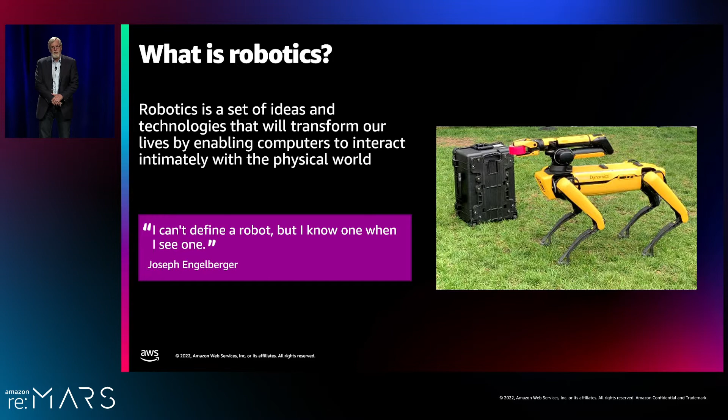So when you look at our companies that are at MassRobotics, they vary anything from agricultural drones to exoskeletons to 3D printers, which we actually consider a robot in the way we define it. And I want to share a little bit of insights on what we're seeing from the companies we work with and what's happening in the industry.

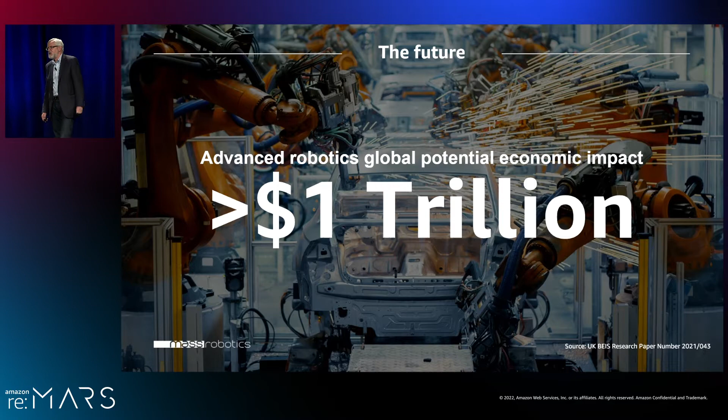So why should you be interested? The market now is projected to be about $200 billion by 2025. To give you a sense, today, depending on whose numbers you look at, that's between 30 and 50 billion. So basically a 4x in the next 3 years. That's a tremendous amount of growth. Also, the impact that robots are expected to have on the global economy in the same time frame will be over $1 trillion. So that's a combination of increase in productivity, decrease in labor costs, things like that. But when you get to those kind of numbers, that's a serious industry that people are getting very involved in.

So when we look overall at robotics, we see a number of different areas that companies are focused on. And I'm going to go into a little bit of detail on each of these to give you a sense. I'm going to include some data just so you get a kind of sense of growth, estimated growth and size. But together as a whole, robotics is an incredibly rapidly growing industry, and one that hopefully you'll be involved in. You'll have companies that will want to start and scale in this industry.

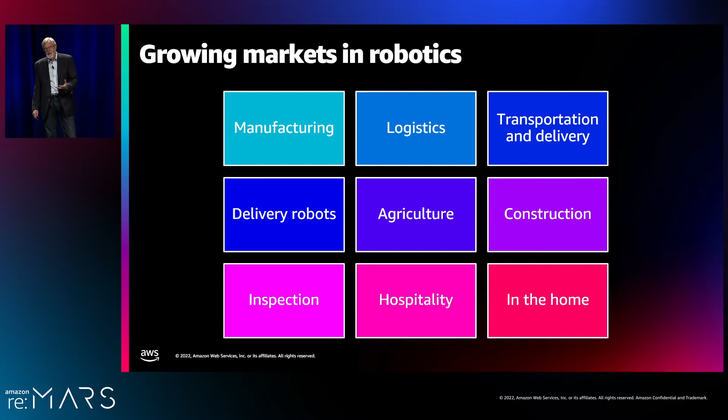So in terms of manufacturing, it's certainly the area that is traditionally known for robotics. Robotics have been on the assembly line of cars for many decades now. And that's traditionally what people think about when they think of factory automation. But we're seeing changes in that. We're seeing a lot more flexibility in automation, so collaborative robots. And then we're also seeing just different ways that robots can be used beyond what you see in assembly, but supporting the entire manufacturing infrastructure - delivery of goods, prepping parts, painting, all the way through, everything you see in a potential site. And again, I'm not going to go through the statistics that are on the slides, but they're just to give you a sense for what people are expecting these different markets to be.

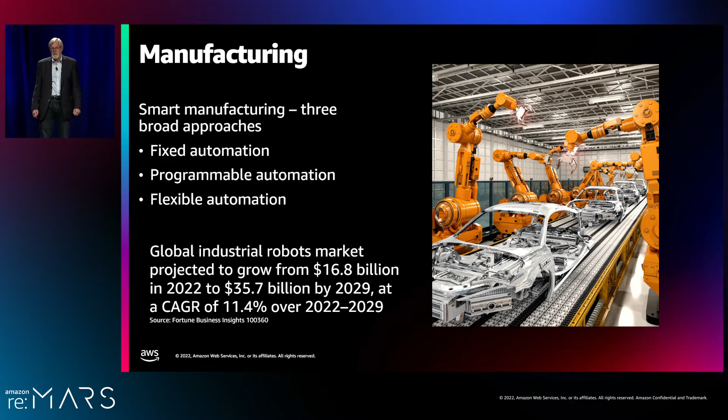So in terms of what we see in our innovation center around robotics, they fall into a couple of different areas. Collaborative robotics, probably the largest - we have a lot of companies working on the deployment of collaborative robots, either building a collaborative robot themselves. And if you don't know what a cobot is, it's basically an industrial arm that is human safe, that depending on its design, but it basically allows you to work side by side that arm. So we have a lot of companies who are working both on the arms themselves, but on the accessories and the ways to install these robots so that they become much more capable and much more easy to deploy and install, which opens up the market. It allows small and mid-sized manufacturers greater access to these tools, and we're seeing that show up in the numbers that are growing.

We see a lot around manipulation, the end effector. So soft robotics is one area that has certainly grown. We have a company called Ubiros that is doing soft gripping. Soft gripping allows you to pick up objects that traditional grippers cannot. This is valuable in manufacturing, but also in other industries like agriculture - picking of soft fruits and things like that so you don't damage them. That's a great area.

Another area is the ability to high-speed, rapidly plan the movements of the arms and then coordinate them with multiple arms, so you have multiple arms moving very rapidly without collisions and avoiding humans. Part of the way they do that is through workspace mapping, the ability to understand what a human is doing on the manufacturing floor, what the robots are doing, and then make sure there is no possibility that the two will ever come in contact with each other. There's a company called Veo and a few others doing this, using different types of sensors, building their own sensors to really map out that manufacturing floor.

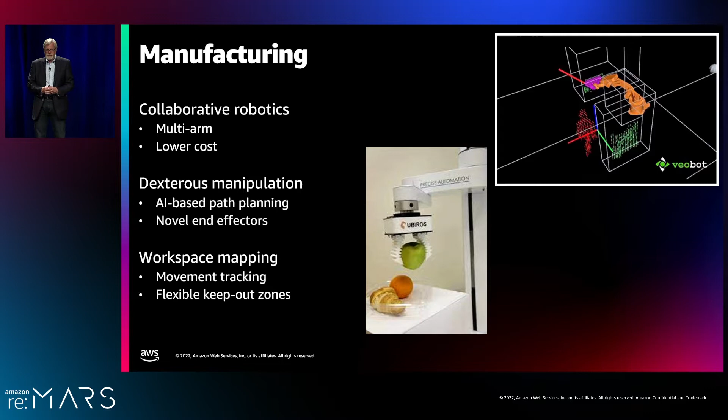The other area we're seeing, specifically on cobots, is that they right now make up a very small portion of the overall market - 3 to 5% of industrial arms are cobots. That is expected to increase dramatically, for a number of reasons I already mentioned. We're seeing Universal Robots, which is probably the most popular collaborative robot - in the picture you see, that's the gray and blue part of their robot. They've sold over 50,000, 55,000 I think now, and that's really only sold in the last couple of years. So we're seeing a huge amount of growth in this.

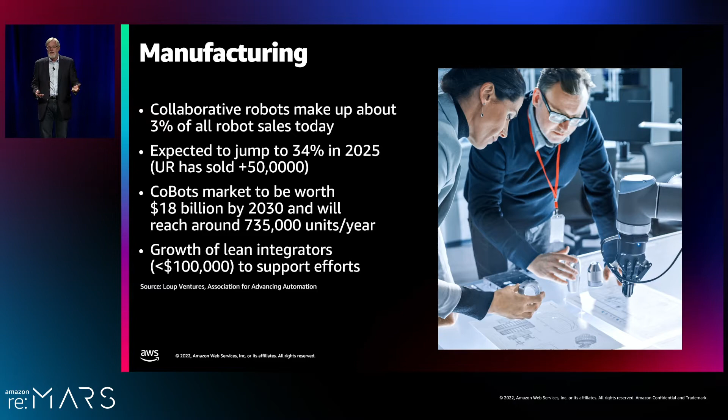As I mentioned, the interesting area is the cost to integrate. Traditionally installing robotic arms has been about a third to two-thirds - a third being equipment costs, two-thirds being installation and support costs. So when you're looking at a $50,000 arm, all of a sudden your entire package is $150,000. We're seeing a lot of what we call lean integrators, people installing these for significantly less and supporting them for significantly less. There's also software that allows virtually anybody on the factory floor to control these arms, install them, reprogram them, which is a big issue for small and mid-sized manufacturers. They don't have a long enough run to install these systems permanently - they might be doing one job, then transition to another. If they need to bring an integrator in to help move that robot to the next job, they can't afford it. So new technology is being developed in that.

Certainly not surprising in logistics - we're at an Amazon event. I think you've all heard other speakers talk about what's happening. If you attended Tye Brady's talk, he announced 2 new platforms that Amazon is releasing within their systems to improve logistics. We see a number of startups in this area, and they're getting significant funding to really address the challenges that I think people are well aware of.

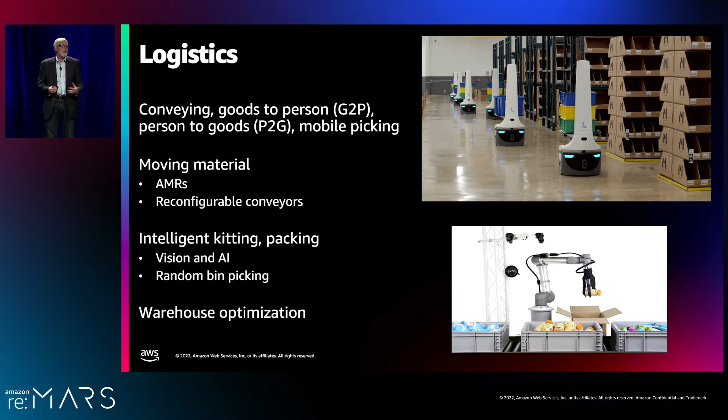AMRs, autonomous mobile robots, are probably one of the fastest growing areas, and then also the ability to manipulate, to pick. Picking still is a very challenging problem, mostly done by hand. In all of these automated system sites, you'll still have the human do the picking, but the robot takes away the movement of the goods. That increases efficiency, but picking is still a challenge, and that's where a lot of companies are focused, to see if they can come up with better, more efficient, more intelligent ways to pick.

The market in terms of logistics - we talked some about manufacturing, but the amount of investment in logistics robotics right now is really pretty amazing, and also the amount of activity. Here's a couple of points to give you a sense: Locus Robotics, which makes a warehouse automation system, just announced they've sold 2,000 of those to DHL. As a small company, Locus is still pretty young, so that's a huge order for them.

Then we look at some of the other ones - Berkshire Grey did a SPAC, as well as Symbotic. Symbotic is a total automated storage and retrieval system, and they have Walmart as their major customer. So you look at these kinds of deals and the VC money that has been invested, and you can understand why people believe this is certainly one of the largest industries within robotics.

Transportation and delivery, I'm not going to talk a lot about that. You certainly have heard about autonomous vehicles. We really are interested in the other non-traditional ways that people are addressing transportation.

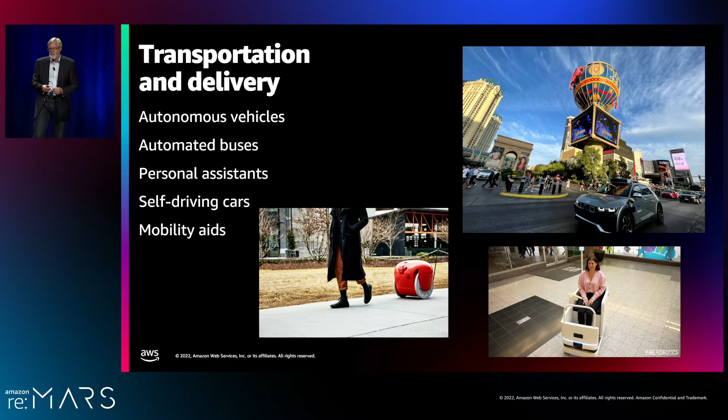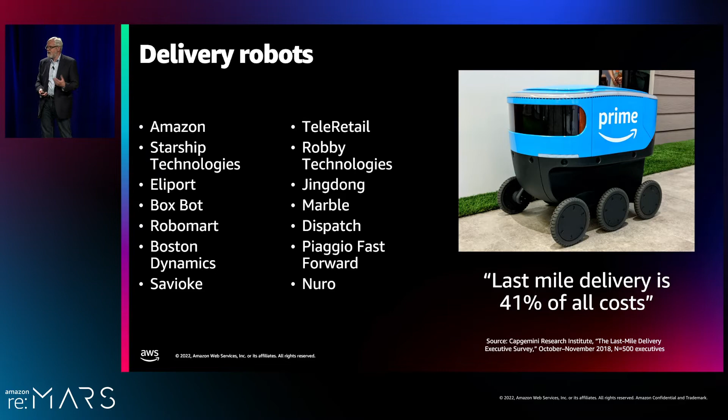As a section of transportation robots, we certainly see delivery robots. There are many companies trying to address this problem. The biggest reason is it's a significant portion of the cost of an entire delivery of your item that you order from Amazon or whomever. Almost half of that cost goes into what we consider the last mile, from the truck to the door or to the apartment or office. One way to address that is with delivery robots. A lot of companies doing that—Amazon's got their Scout, and there's a number of other platforms. That's, we think, a very interesting area for startups. No one yet dominates that area, so there's the ability for startups to get involved.

Agriculture, interestingly enough, we're based in Massachusetts. Not a lot of agriculture there—we have some apples, we grow some cranberries, but not huge agricultural fields. Yet a lot of the development is done, primarily because the technology is coming out of some of the universities. We see that in areas like field inspection for use of fertilizers, water, pesticides, and also ways to monitor the growth and health of the fields.

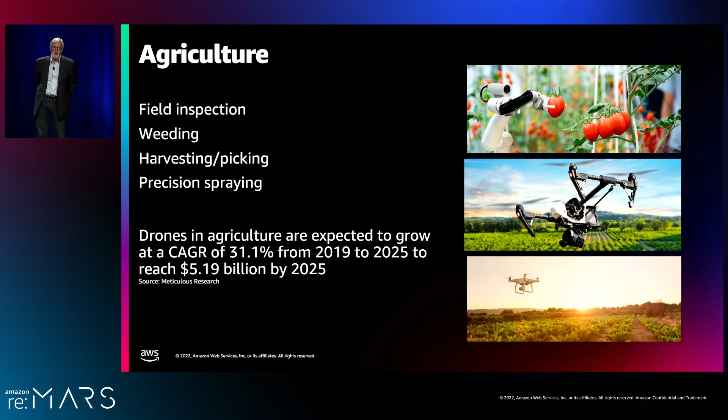Construction is another industry that I'd say is a laggard in terms of robotics. In Boston and most cities you're seeing cranes like crazy and construction going nonstop, but it's a hazardous environment. They are consistently behind schedule, over cost, and do not use automation to the extent that other industries do. That's starting to change—we're seeing some major construction companies now invest in accelerators or innovation spaces specifically targeted at construction, looking at technology across the range from site prep all the way to finished construction. This is one of the areas we believe will continue to grow, though it's still emerging.

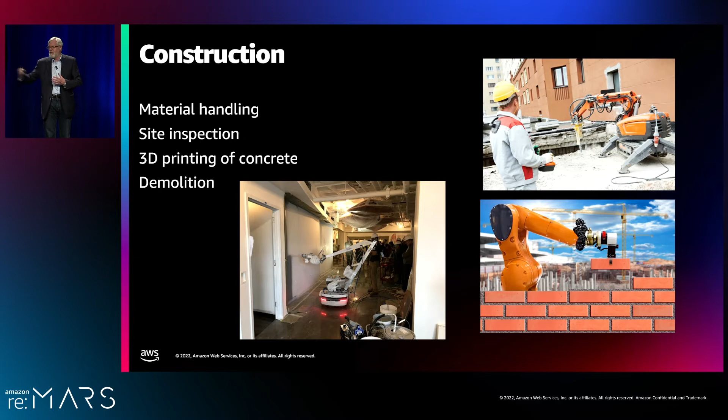Hazardous area inspection is one of the things Allison from Waymo talked about yesterday. She gave 4 areas that you should make sure your robot addresses. If you address all 4, that's really great. One of them is certainly hazardous operations, because there's real value to being able to take the human out and have a robot do its job.

The picture on the right is a small ducted fan drone called Dronut, and it's very safe—you can see a gentleman grabbing it out of the air. It's great for inspecting very narrow spaces, ducts, and other things where you want to get eyes on what's happening. On the lower left is a company doing oil tank inspection, another area you don't want to go into. If you can send a robot in to inspect the seams and welds, you can really save lives by taking people out of hazardous areas. It's a small but growing section.

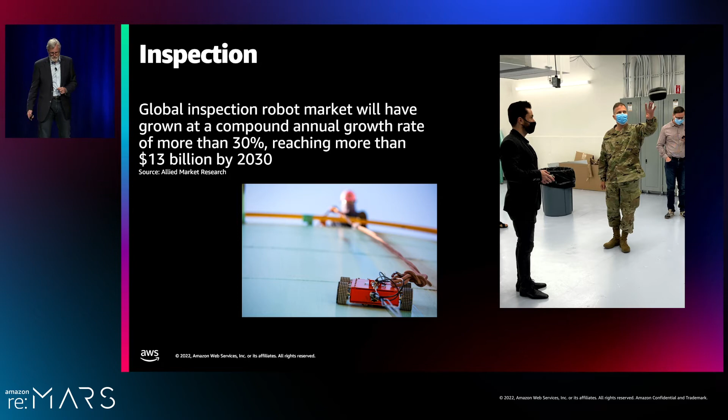Hospitality is interesting because we don't see a tremendous amount of traction, but we see a lot of interest. There are companies doing delivery robots—if you forgot your toothbrush, a robot can bring it up to you, and we're starting to see deployments of those. There are also luggage delivery robots and other things that help movement of goods within a hotel, much like a warehouse. There's work being done on automation for the concierge side, though I think we're still a ways away there. People still want a human to interact with, but we know companies working on that as well.

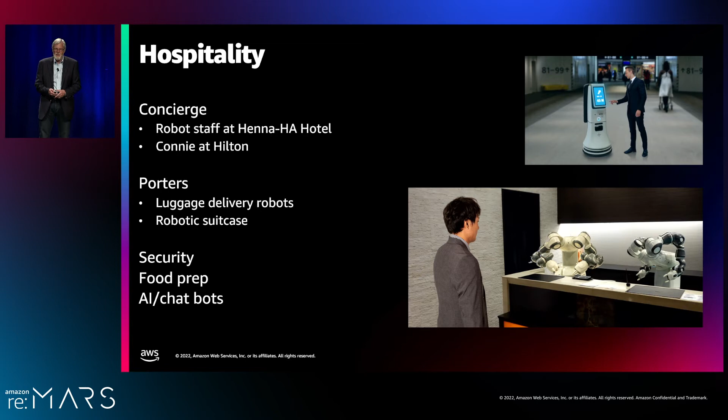In the home, how many folks have a Roomba or another robotic vacuum cleaner? That's pretty good, surprisingly a little over half. Some of you should go look at it—when they first came out, they were doing kind of a random walk. You'd put the vacuum down, it would bounce around, and over time, statistically, it would cover your floor. Today they're much more intelligent, with the ability to map, plan, and avoid obstacles.

In fact, iRobot just introduced their poop detection system, so the robot can avoid all sorts of things you don't want it to go over while cleaning. This is the iRobot j7, I believe, which has an evac system that automatically takes the debris out of the robot, so it can continue operating for a very long period of time. That's one area, but we see others.

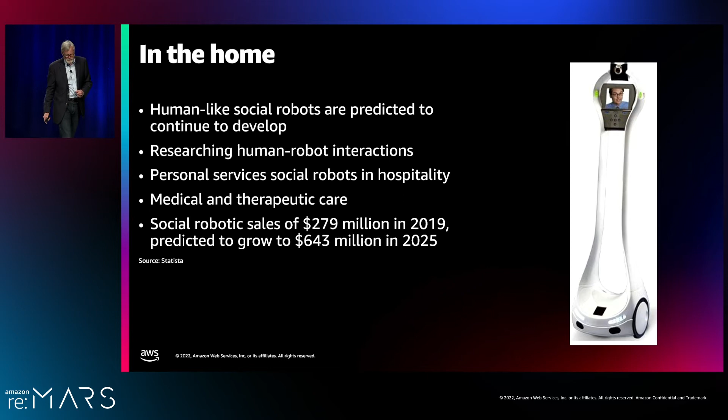So what does all that mean, and why are we seeing this kind of growth in robotics? And why does it bode well for startups who want to get in and scale? We see a number of big trends that are really impacting the industry.

Sensors are a critical part. Cost of sensors has come way down. I did a robot many years ago, a bomb disposal robot, and it had a camera on the front. At the time we were using a Sony block camera that was about $500. That same capability is $2 today. So in about 10 years, the price of that sensor has gone dramatically down. That's primarily driven by your cell phone, but the volumes have gone up on those cameras, and costs have come way down. That's true across many of the sensors we see. That allows companies to embed more sensors across the platform to provide better situational awareness and better performance on the robots. So that's big.

Mobile manipulation. Right now, most of the manipulation we see is fixed. Most of the industrial arms are fixed. You're starting to see now some of the arms getting on mobile platforms. There's a lot of challenges when you add mobility to a platform, to an arm, in terms of getting it to be as accurate as you need it to be and having that platform be stable and repetitive in its location. But companies are working on that, and we're seeing that across all the industries I just talked about going to be a major player.

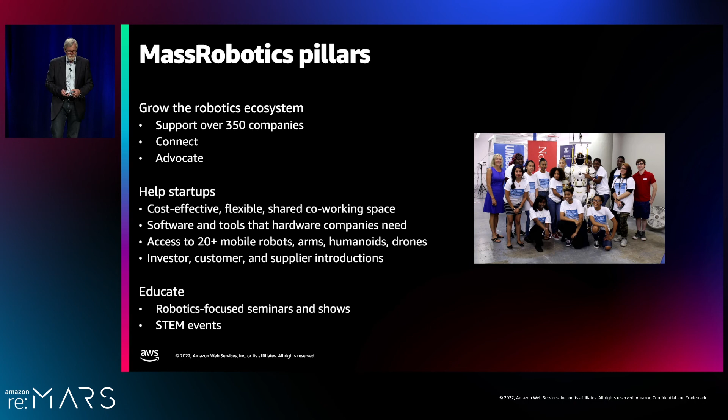In terms of our model for space, I wanted to talk about this for a brief second because we're a little different. When you think of accelerators and incubators, they're at different stages for startups. A lot of times an incubator will really be early on - if you just have an idea, it's a great way to get started. Accelerators, obviously their target is accelerating that, taking you from concept to understanding how to build a company.

We are actually a little bit later stage. We call ourselves an escalator, because the idea is we're going to take young companies and hopefully escalate them out to product in a successful manner.

We see companies join us that usually have a product idea and are really looking to build that into a product. They might already have a prototype, but they want to understand how to manufacture it, how to get customers, build revenue, build a team, get VCs to invest. And then they will exit and move on to their own offices.

And so that's what we have - a combination of physical, strategic, and ecosystem parts to our effort.

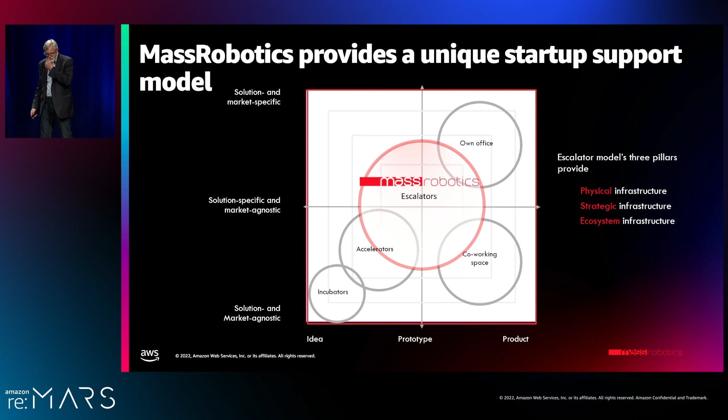So Tennibot is a robot that picks up tennis balls. If you go out and play tennis, if you're a big tennis fan and you sit there with your bucket practicing serving, the robot will go get them, collect them all, bring them back to you. Pretty unique, but also for those who are really tennis fans, it's a big product, and it's not that expensive. It's a consumer product. So we see a bunch of different companies across the board.

I won't go through all of them, but there's certainly a range, and we see robots addressing almost every need across society.

We are funded primarily by support from our corporate partners - AWS, Amazon Robotics, iRobot, and some of the other players in the industry that provide financial support, in-kind support, and mentorship, guidance, and so forth. These are critical to our success. We're excited to have them on board, and they can help all of our startups.